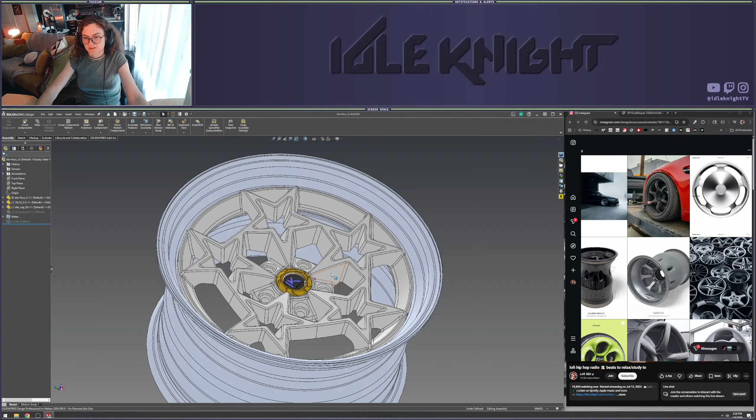For the next 2 wheel designs in this series, I'll start from scratch and explain the basics of where I got these, or how I created the models for the hoops, and even the basics of 3-piece wheels and the manufacturing process of billet or forged or multi-piece wheels, whatever you want to call them.

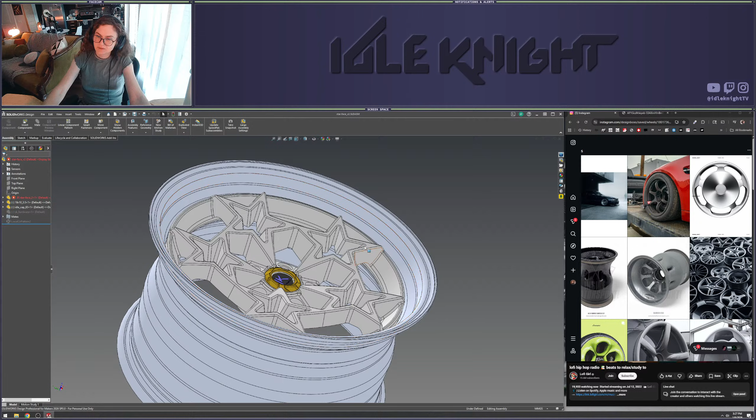These are going to be designed for CNC machining and will be produced in California at a facility. I can go into that later down the line, but at the moment we're just making things that look cool.

Once I make the next one, I'll explain more of how I know how large to make these, the kind of manufacturing constraints, center cap mounting constraints, and how to make them actually attach to a car.

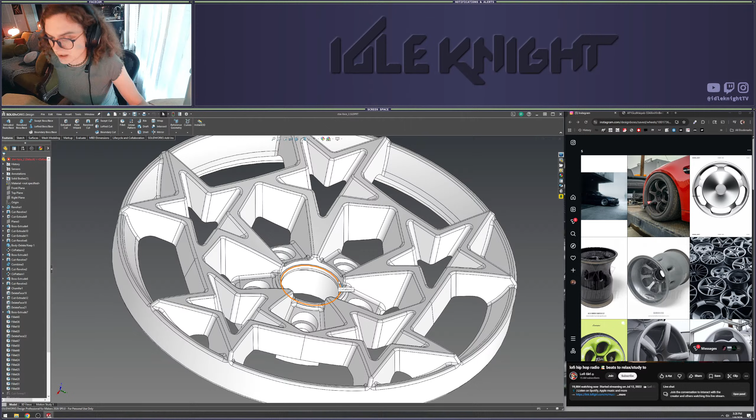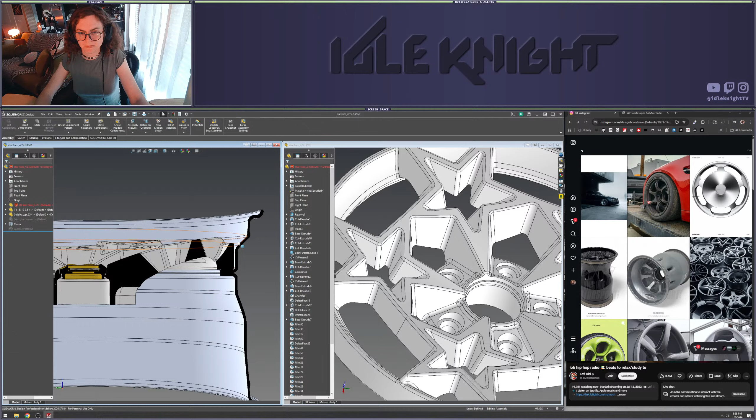The customer wanted me to work on this outer area and make it flow better with this step in the outer lip, and then possibly come out over that to kind of overhang on this lip here.

But at the moment I'm just going to be kind of cleaning some stuff up here.

Setting all this stuff up was easy. It wasn't that easy, but now that I'm actually on the stream and doing stuff, it's like, what am I doing? What is design? What are wheels?

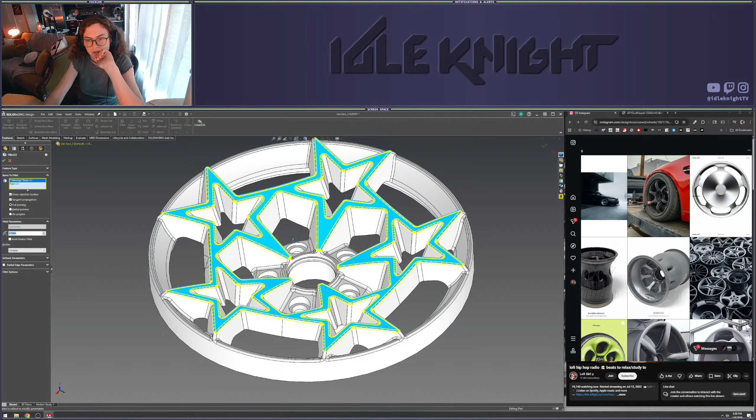At the moment I'm kind of just cleaning up this feature tree a bit so I'm working on a file that doesn't have any errors. It looks like last time I was working on this I was kind of rushing through stuff, so some of it was a little messed up.

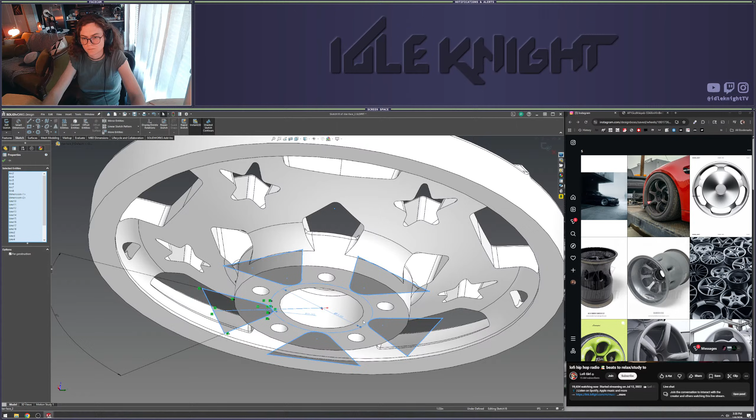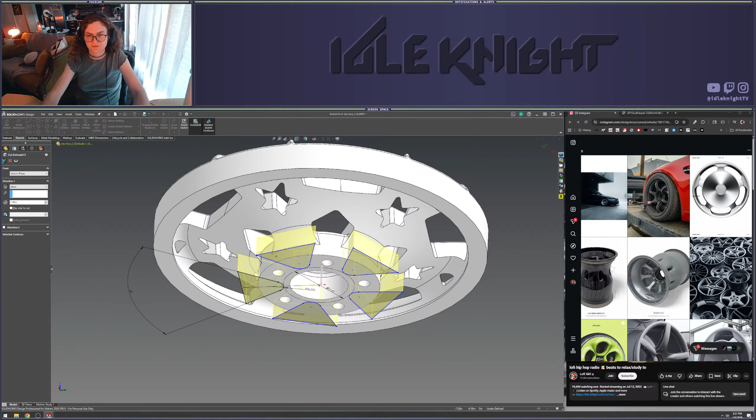Where's the error? Gosh, this software is... I updated SolidWorks to the new version and was kind of hoping that it would be better, because it's a bit shit. Just always finding ways of screwing things up and making things annoying.

Oh, that's a little error. Oh, there we go. Alright.

So it's SolidWorks, you're working on planes for everything. Gosh, here, let me heat up my coffee. Sorry.

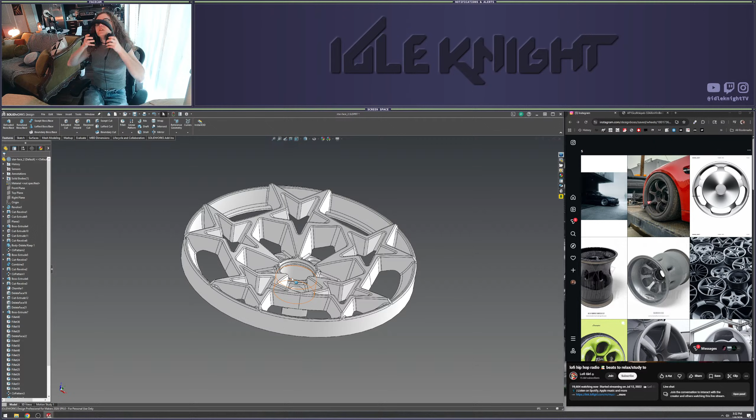We're back. We're so back. We're so fucking back. Wait, can I say fucking on here? I don't know. Alright, hot coffee.

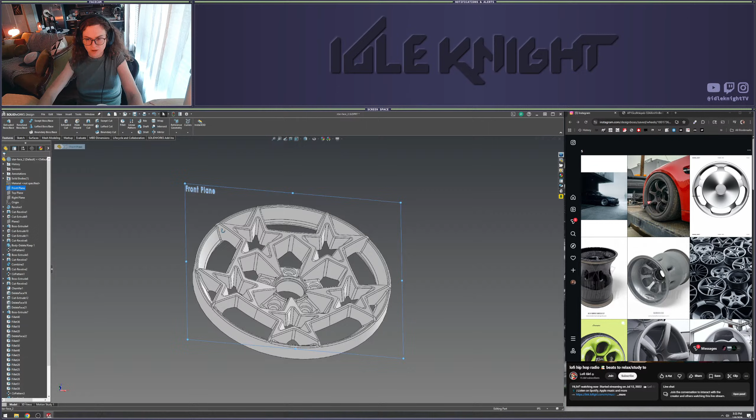So the basics in SolidWorks is everything is based off of these planes. So we have front plane, top plane, side plane, or right plane.

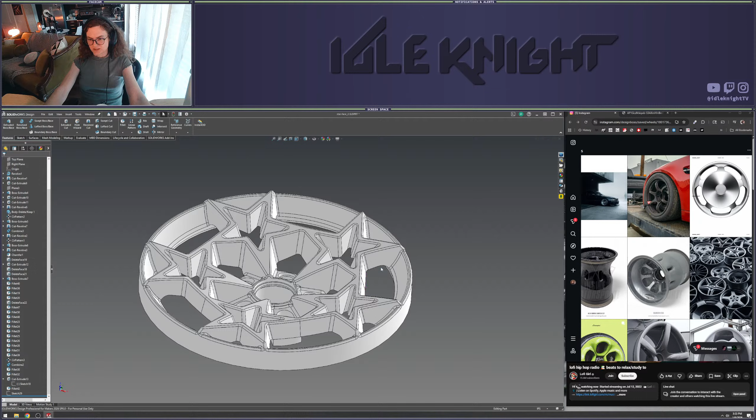Everything starts with just sketching on those planes and is extruded or cut from those planes. It's very different from Blender, 3ds Max, Maya or Cinema 4D, where those programs work with meshes and are much better for creating stuff for video games, because they can make clean, simple meshes that can be rendered in a video game environment or for animations. Whereas this is not a mesh, this is just sketches off of a plane.

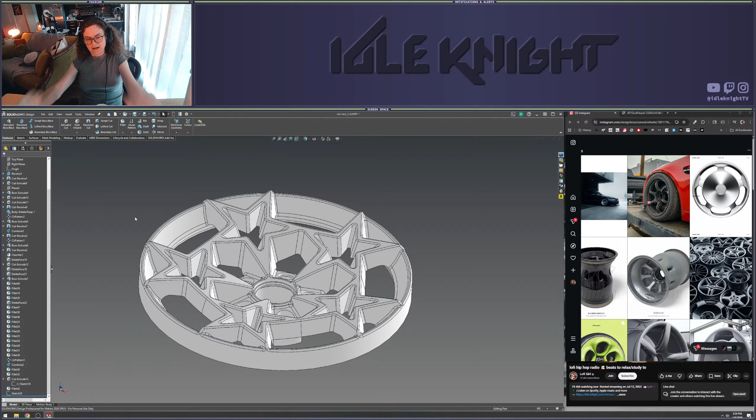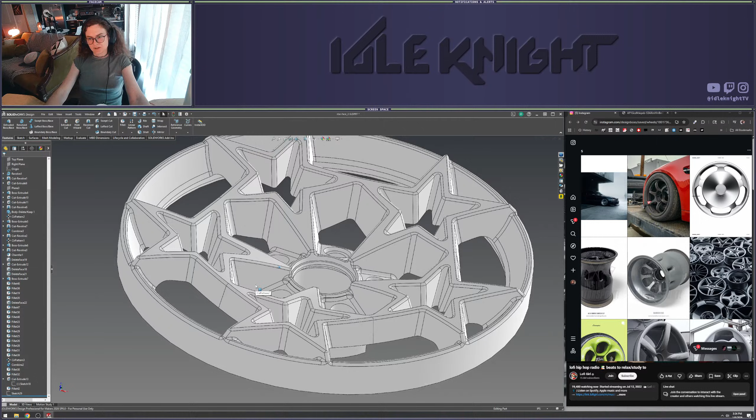It's kind of convoluted, but it's similar to the vector versus raster thing, where raster is like pixels and vector is like math. So it can be expanded out and back in and still have the same perfect curve, because this isn't a mesh, it's like there's math saying the radius of this curve is something. So even if it's a mile wide, it's still gonna be a perfect curve, because it's based off of those equations.

But also everything is constrained by values like millimeters and inches. So depending on where you're working - unfortunately manufacturing in the US, where I am, uses imperial measurements even in machining. So I'm kind of forced to do stuff in inches, even though doing it in millimeters would be considerably easier.

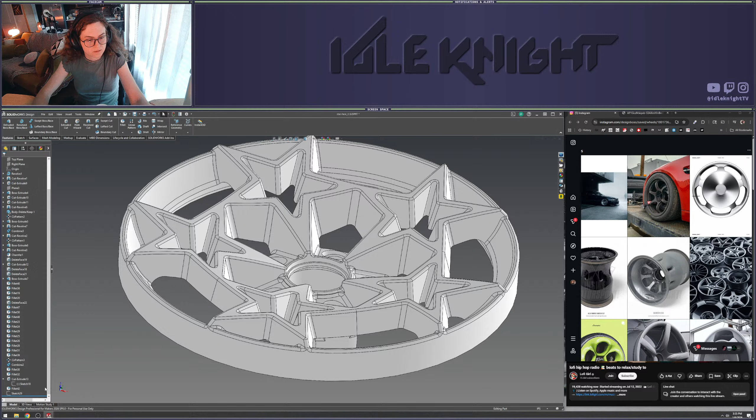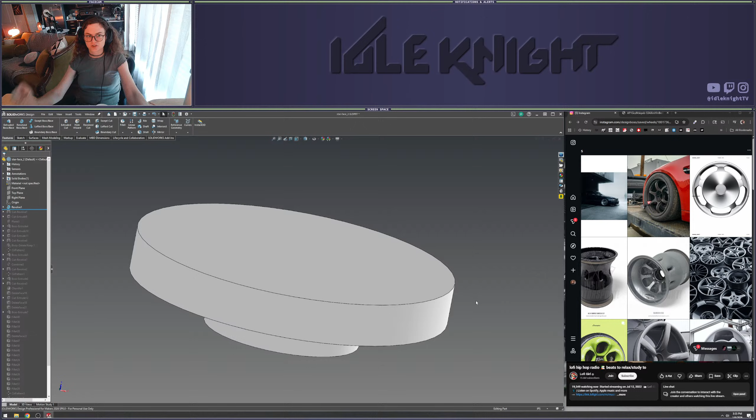But we'll go through how this is made. So at its base form, this is a piece of billet, a chunk of aluminum that was put in a 10,000 ton press - a giant industrial machine that heats the metal up and then compresses it into this shape using 10,000 tons of pressure. That shrinks the molecular structure of the aluminum and makes it stronger than just a regular chunk of basic aluminum.

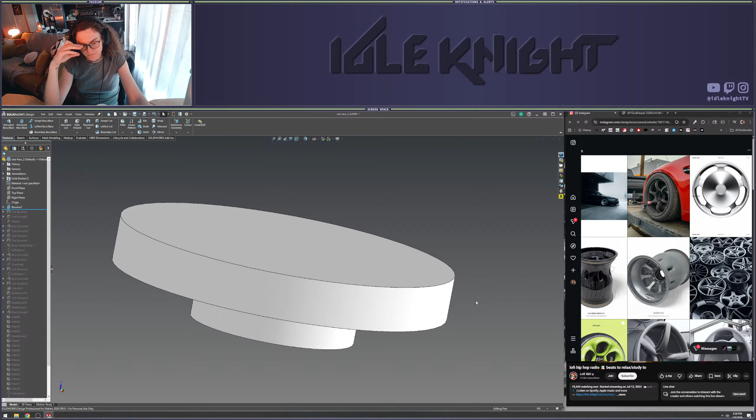So when you see 6061 forged aluminum, 6061 is the specific alloy - that's the percentages of different types of metal in the aluminum, because it's not just pure 100% aluminum. There are additives in there, I'll have to look up exactly what those are, but it makes it stronger or more resistant to water, and aluminum doesn't rust. It makes it degrade less, and it makes it stronger.

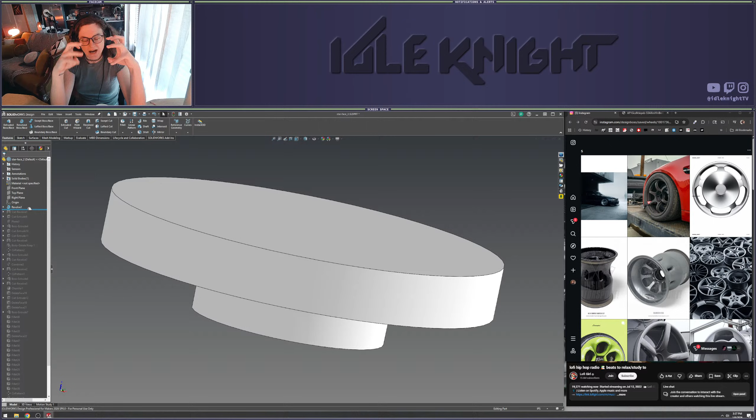And then once you forge that, it becomes even stronger, because it's shrinking the molecular structure down into a tighter structure. So then we have this billet of aluminum, and this was created using this sketch.

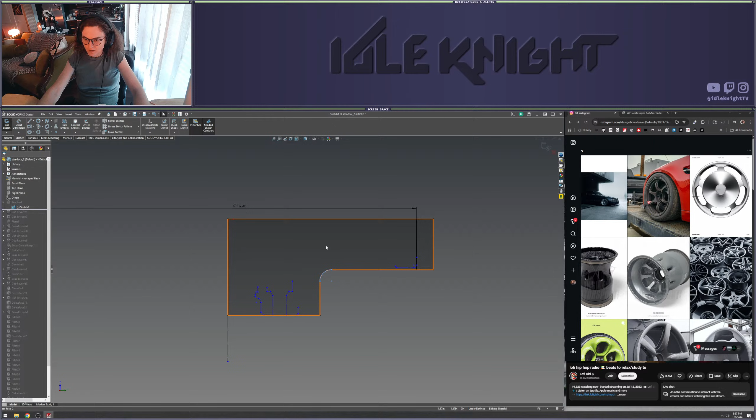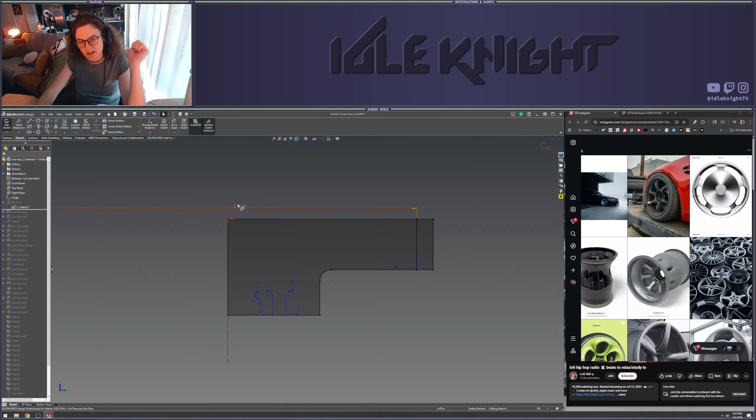This is from the manufacturing facility that is making these wheels eventually. So this is just a cross section of that. And then in order to fit inside the lips and barrels, or hoops as people in the industry usually call them - so in order to fit inside the hoops, which is the front and back lip that the tire actually mounts to - these are 18-inch wheels with a stepped lip, and so that outer diameter is 16.4 inches.

So this is that. I'm just simplifying the file so that I'm starting with the right outer diameter. And then these are some extra sketches that I pulled from a wheel that I previously manufactured, which shows how the center area needs to be for mounting of the center cap, and then the lug holes as well.

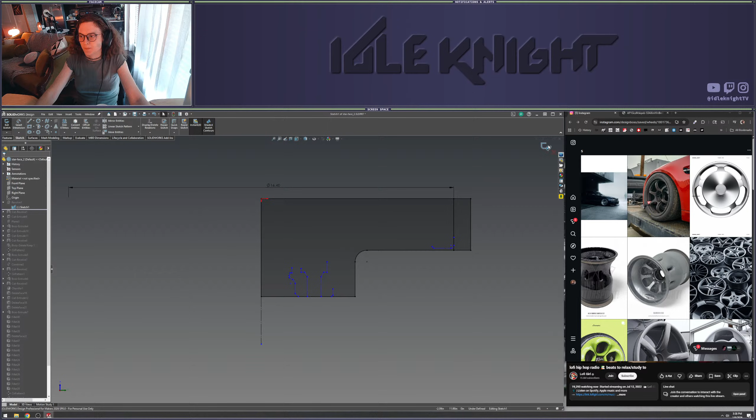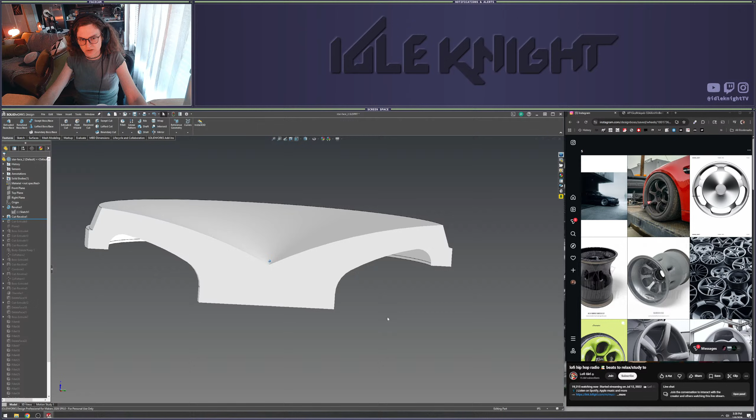But so we've got that, we just did that sketch, revolved it, now we have this. And then I like to get a general profile, let's say, side profile of the wheel. And so I have this - basic form, boom, there's that profile.

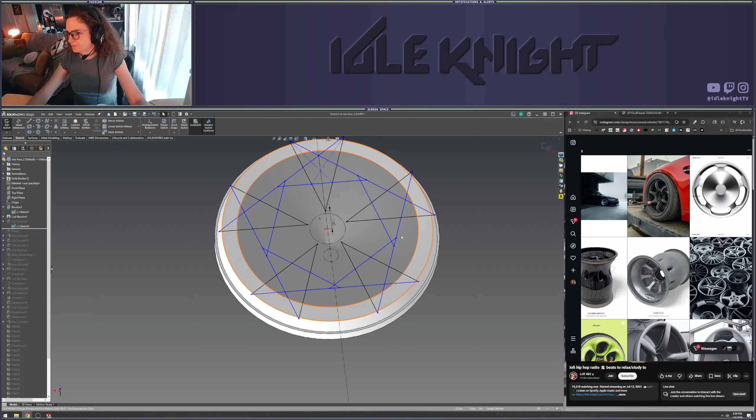And then I started sketching out the wheel design. So this client wants the spokes to be shaped like stars - or sorry, that was the previous one I did, that was hearts. He had previously had a set of wheels that I designed where the spokes were shaped like hearts, and he wanted a similar design to those, but stars instead of hearts.

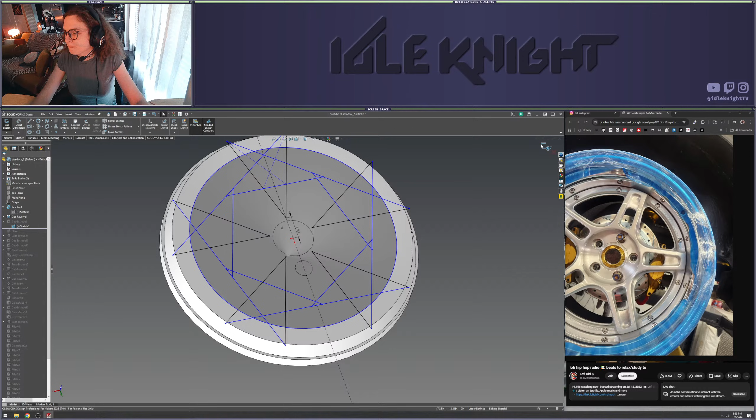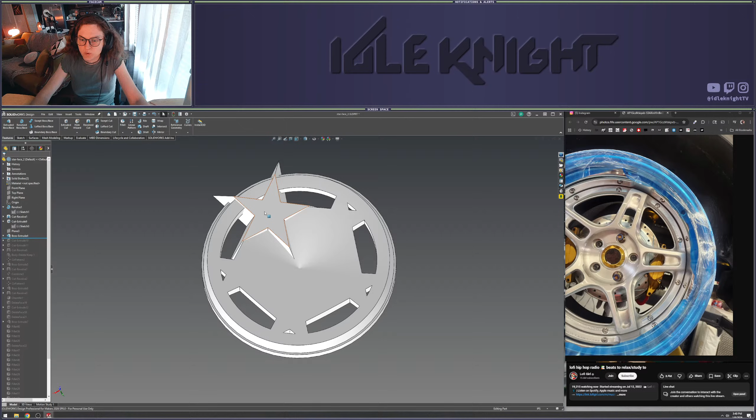I decided the easiest way to get these star shapes in an aesthetic way would be to create them separately. So this is going to be done a little bit different than a lot of the wheels that I do. I don't like the spokes to be cut just like straight cuts down through, so that the walls of the spokes are just like this. I feel like that is really basic and it leaves a lot of room for visual interest and coolness.

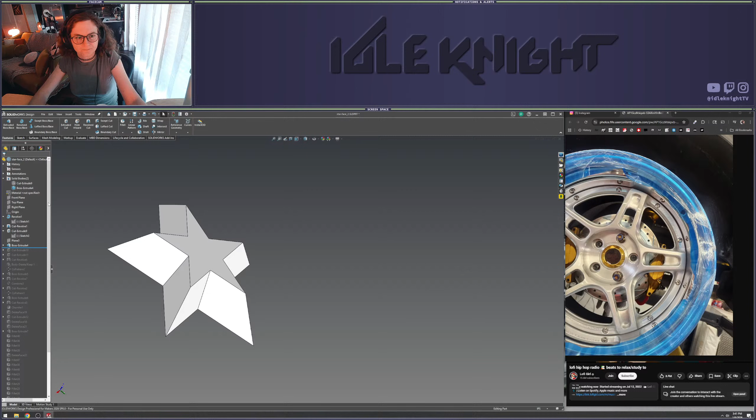And so instead we're going with a lot like angled edges - what is the draft? I guess you could say they're drafted outwards. And so this is that basic star shape that I made.

And we're gonna cut the center of the star out. And then that original billet piece, all I needed from that is that outer ring, which is where the wheel mounts to the hoops.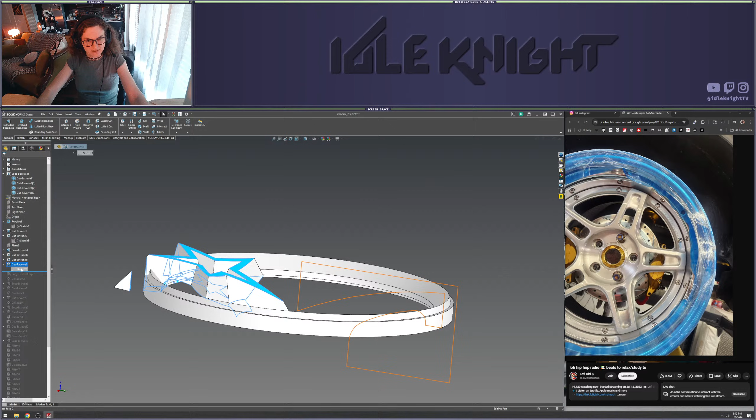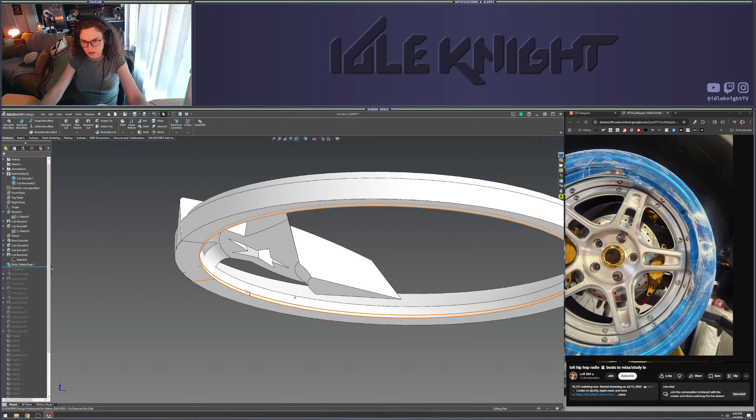So I cut out the center of that, but I still want this star-shaped spoke to follow that outer profile. This revolved cut is basically a copy of that initial profile sketch I showed you earlier. And then we're cutting out the star, and then we'll get rid of those little bits on the outside. Now you can see this star is already starting to look like a spoke.

And when we copy them around, boom, there, now we have 5 star-shaped spokes. So we're getting into it, let's see.

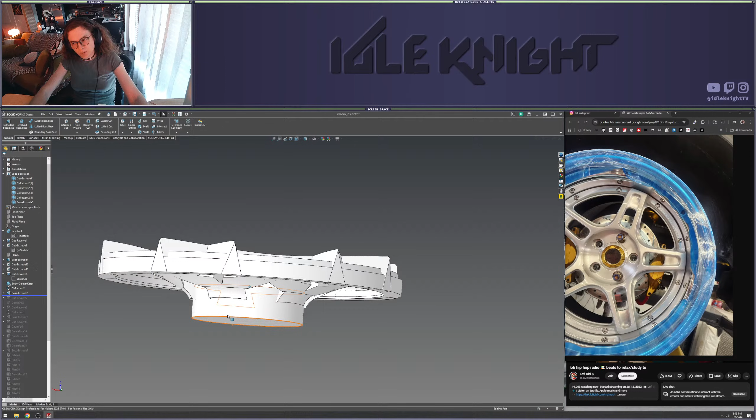But we still need a center point where the wheel mounts to the car, because we need those lugs, and we need it to mount to the car. You can see on the right here, I just have this up as an example.

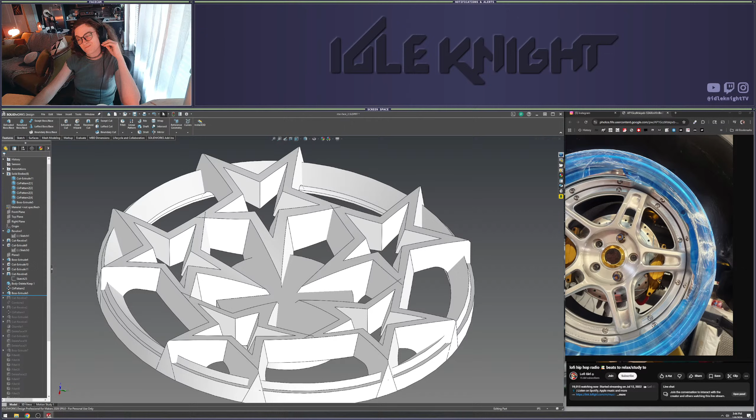This is the last wheel design I did for a friend here in Denver, and they finally came in the other day, and I went over there and we did a test fit on the car. You can see the wheels are still wrapped in the protective film and don't have tires on, but we wanted to make sure they lined up nicely with the brakes, didn't hit anything, and thank goodness they didn't. They all fit, so everyone's happy. Once he gets tires and stuff, we'll go over there and get some pictures of the wheels actually on the car. But I figured I'd keep this up on the side of my stream just to show you a real world example of something I've designed in this same manner.

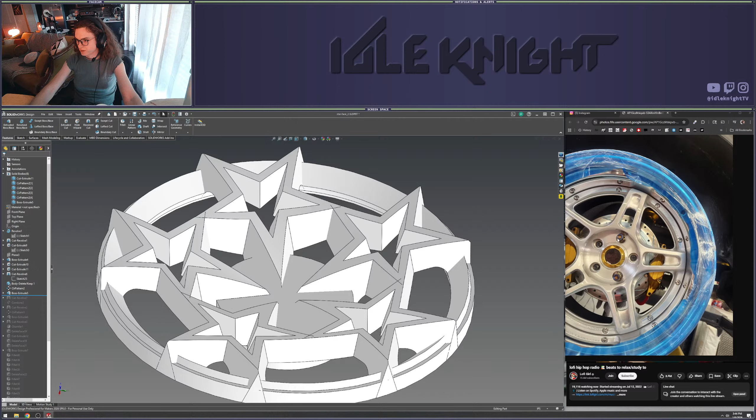And you can see that it needs that center area where the lugs mount. So we're just adding in essentially a little cylinder in the center, now combining it into one piece.

Here's one of the lug holes. And this angle there has to be a specific angle because there's a standardized pitch for lug nuts, so that you can get whatever set of wheels you want, and the lug nut, as long as they're the right bolt pattern, gets held onto your car and they don't fall off or rattle.

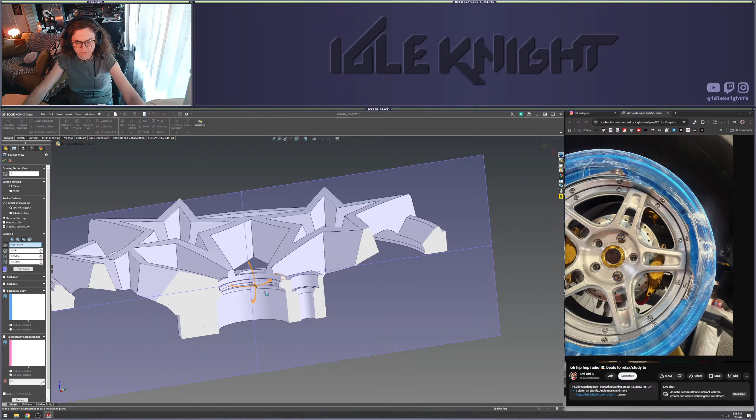And then just working on making it look a little bit more interesting, and then cutting out this shape here. And so this shape is a standard, like this has to be this way.

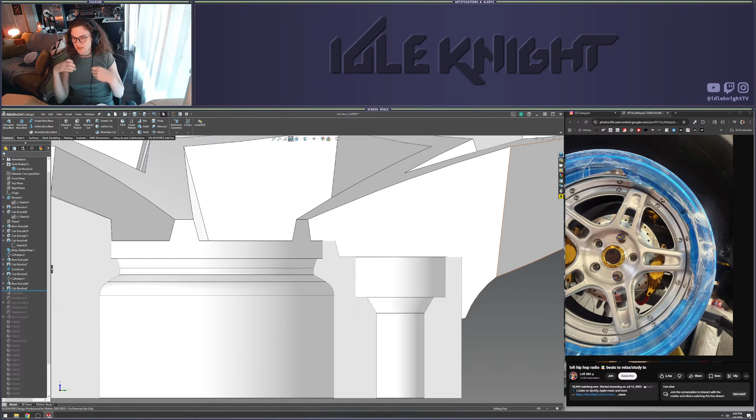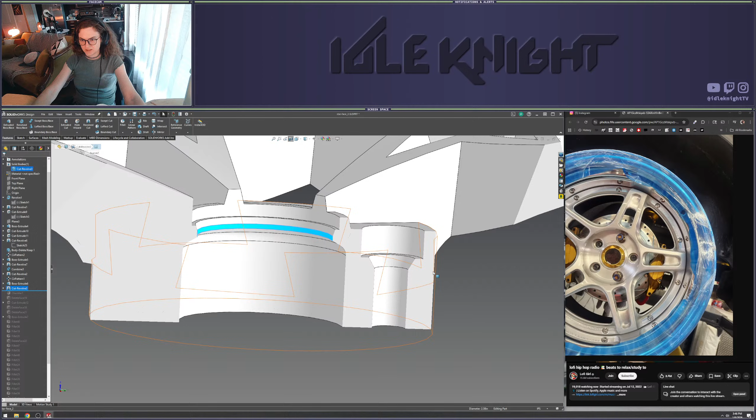So that center cap, you can see on the right here, this gold piece with a little carbon fiber bit in the center, snaps in. The center cap has a little rubber gasket, and when you snap it in, the rubber gasket will go past this corner right here, and it will hold the center cap into the wheel and keep it in there even when you're driving on a racetrack or on the highway. So the wheel needs that exact shape.

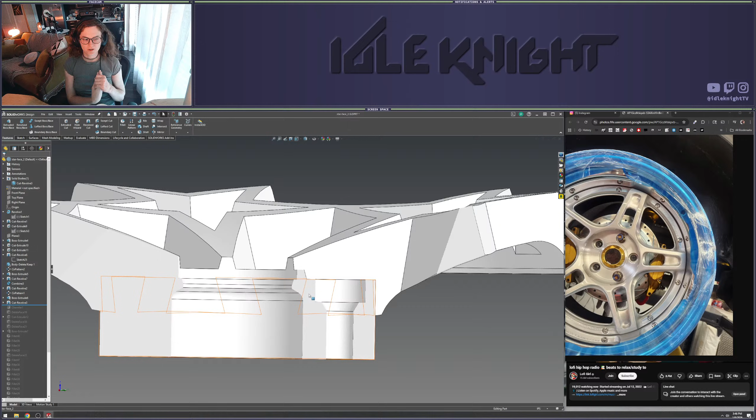And then I wanted it to not be just a cylinder around the center there, just because, yeah, you can see that's just kind of ugly. You just want to address every part of the wheel you can and make sure it looks good. You don't want it to be too busy, but you want to make sure you're thinking about every little part of it as you're doing it, so that you have a thoughtful design at the end.

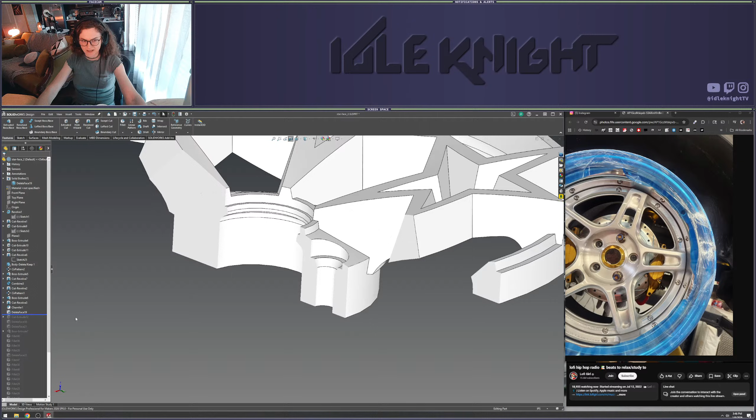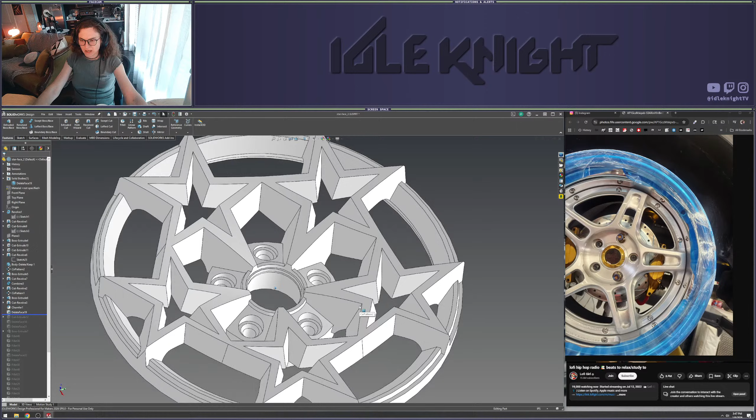And then once I had this basic wheel here, you could see if this was made, it would bolt to a car. The center cap would attach to it. But it has really hard edges and corners, and nothing in real life is ever a perfect corner.

Even if you just mill the top and the side of a piece, that edge will be sharp, yes, but when you start zooming in, it's gonna be rough. It's not gonna be just like a perfect line like it is on the computer. And so you want to control every one of those corners.

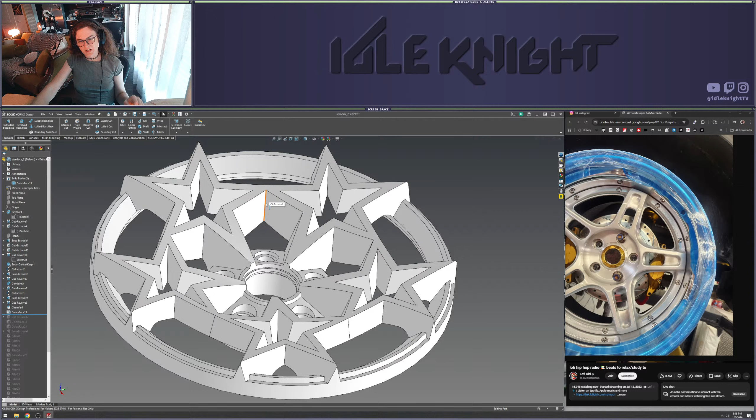Every one of these edges needs to be controlled by you, because if you don't control it, the machinist will. The tool they use to cut these out is essentially a really fancy drill bit in a CNC machine, and depending on the diameter of that tool, it's going to round these edges no matter what.

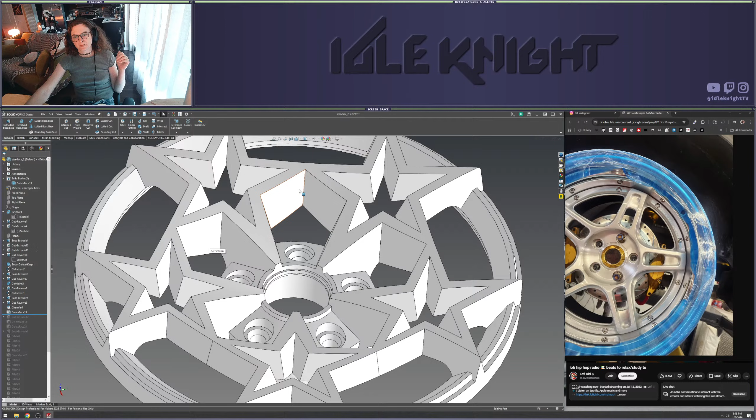If you don't tell them, they're just going to say we can't make that. If I sent this thing and said make this, I would essentially be leaving those choices up to the machinist. And I want those choices to be mine. I want all of these edges and corners to be my choice.

The easiest way to do that, I've found, is to cut the wheel into one spoke and then just repeat it back around into five. That's essentially doing one fifth the work. So why not?

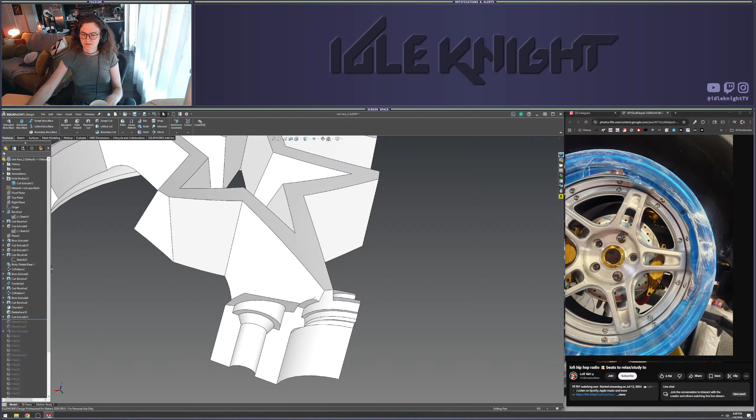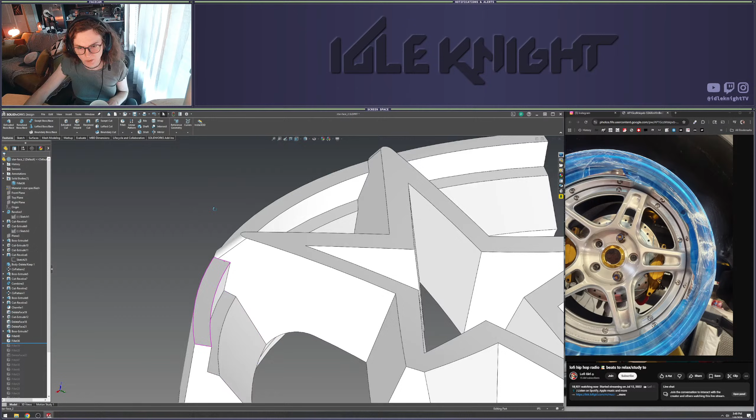Oh gosh, all this talking is going to be rough. Okay, see where we went next. Okay, so I end up doing stuff in some kind of weird roundabout ways sometimes. I'm trying to get better at doing things with fewer steps, and making this feature tree simpler.

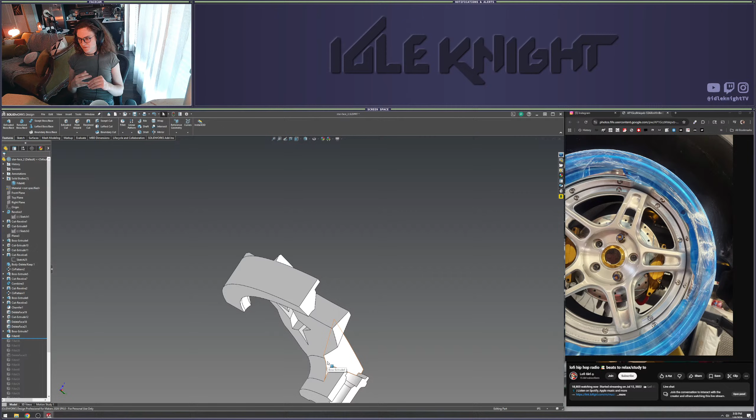But at this moment, we're just gonna make it look cool. That's the goal. Oh shoot, okay, so first thing we do is some fillets. Fillets is, I guess, a manufacturing term for rounding a corner or rounding an edge.

You can see I made this large fillet at the bottom, bringing the spoke into the center hub area. This visually looks better, but it's also stronger, because that nice big sloping curve is going to distribute weight around better than if it was a tight little corner, which would create a weak spot later on.

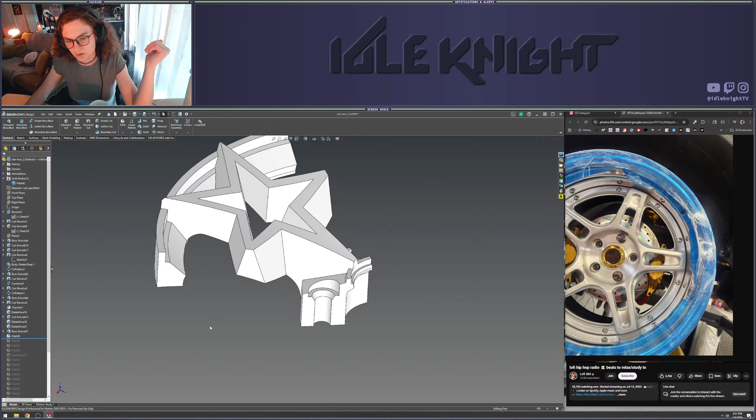At some point in this stream I'll show the actual stress testing, because in SolidWorks or Fusion 360 or any of these pieces of software, they usually have some sort of FEA, finite element analysis testing or simulation capability. That's basically where you choose materials, like 6061 aluminum, and then simulate forces being exerted on the wheel to figure out where the weak points are before it's even made.

So like these wheels on the right, before I sent them for manufacturing, I tested the wheel to make sure that the assumptions I had made, like these spokes having this nice I-beam shape and this thickness, would be strong. Yeah, I can probably guess at it, but it's much better to do these simulations so that at least you have a simulated confirmation that your assumptions on strength and design were correct.

And then I'm still going down this feature tree on stuff I've already done, just kind of explaining my way down. This thing on the left is called the feature tree, and it's just a history of things I've done, which is probably the best part about SolidWorks, having a visual record of everything you did.

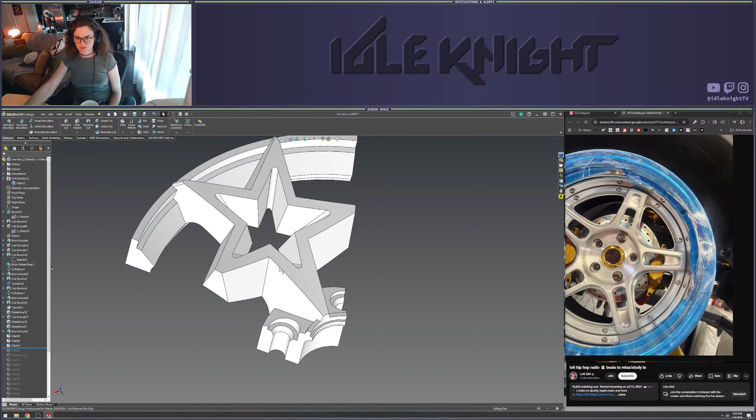You could even delete stuff out of it in the middle. It might cause a lot of problems, but you can move things around in the feature tree. You can go back and edit one part, then bring the tree forward and see what happens. It means everything you've done is reversible and changeable, unlike in Photoshop.

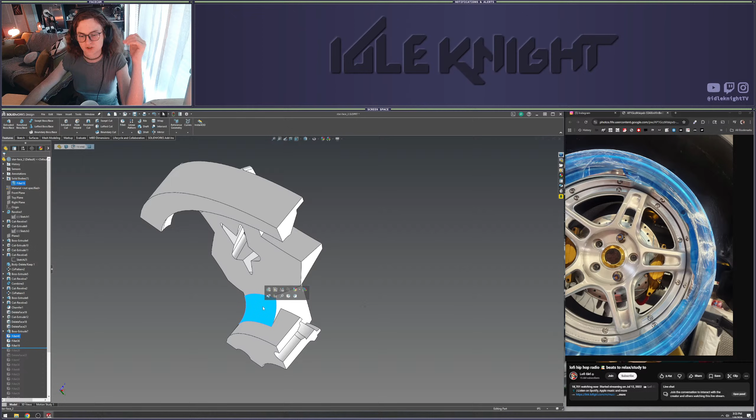If you blur a section of an image and save it, then open that again, you can't get those pixels back from blurring that. Whereas in this, if I want to go back and change this thing, or even the diameter of the wheel or the bolt pattern, I can go back and just open the file at any time. So that's pretty sweet.

So this is just fleshing out the actual design. Like I said, you can't have any sharp corners, and you really don't want sharp corners on wheels, because imagine you or the person you're paying to mount the tires, they're grabbing your wheel and they slice their hand on a sharp edge.

Also, once they go into the finishing of the wheel, all the edges are going to get blunted in the polishing and surface finishing stages. So nothing's ever going to be blade sharp anyways.

But these rounded corners are stronger because if you bump it on something, like if it goes to a point, that little point is gonna chip off. It's like if you have a kitchen knife and you bang it on the edge of a counter, you're gonna chip that thing. But if you bang the back side of it on that, it's probably not gonna do anything because it's thicker. So it's stronger. Everything needs to be rounded at a certain point.

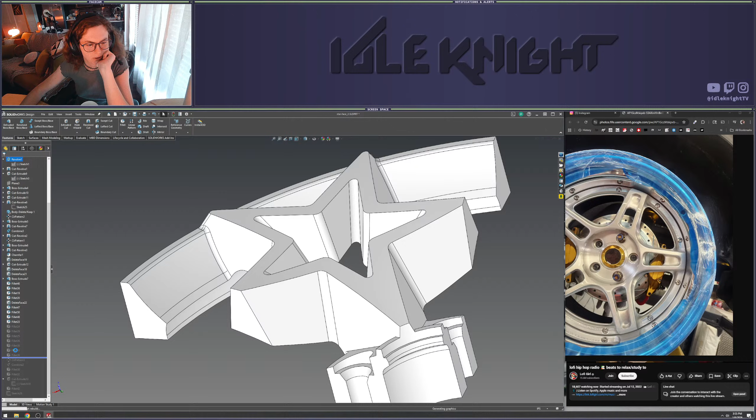So you can see all of these are fillets. This entire part of this feature tree is just rounding stuff off. And now you can see these forms are starting to flow into each other. And you can even take off the corners, and you can see these nice rounded edges are gonna reflect light in a much nicer way than if it was just a bunch of sharp edges.

And then we're gonna just copy and radial repeat that all the way back around, put that final top edge fillet on there. And then the last step for me on the wheels is this back pocketing, it's called.

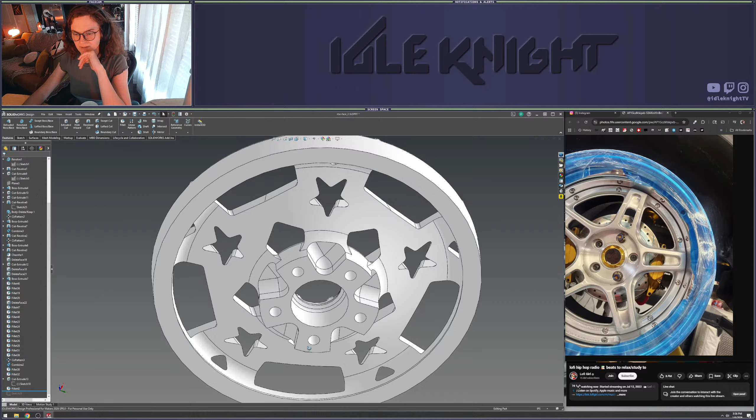It's not necessary, but it's gonna make the wheels lighter. And even if you're not driving a race car, you want your wheels to be as light as possible, just for making them easier to take on and off your car. But also in a technical sense, any sort of spinning weight is the most important thing to reduce.

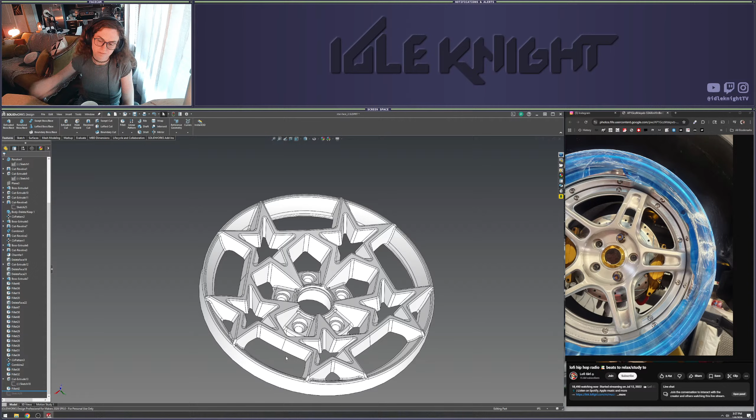Because as your wheels are spinning and centrifugal forces are pulling outwards, a heavier wheel is going to be worse than you'd think from just the weight difference. Once those wheels are spinning and you're turning the car around a track or something, even just a couple pounds lighter wheels translates to easier steering and a more nimble car.

But yeah, obviously these aren't going on a race car though. It's not the most— it's a form before function design, that's for sure. Oh God, I love caffeine.

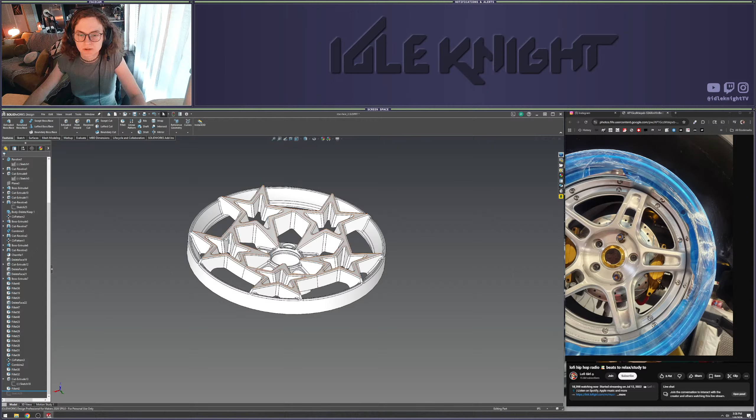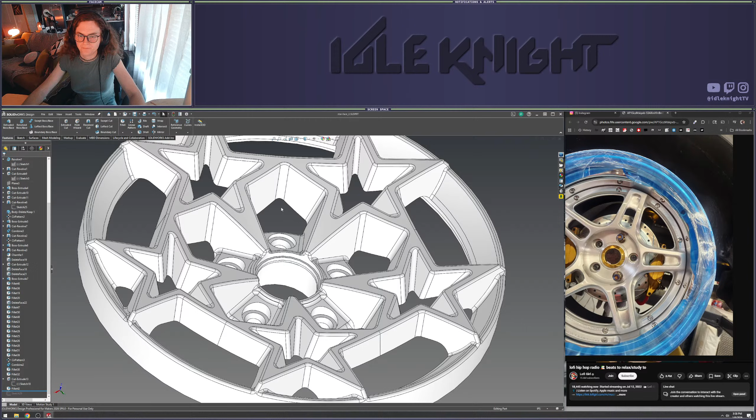Let's see, gosh, now that I explained all that, what are we even doing here? I guess we could just go into— we can go into the next steps and stuff, and then I'll have a better plan for changing the design for the next stream. But I think for this one, it's just mostly me figuring out the technical aspect of streaming to Twitch and YouTube at the same time, setting up all the devices and everything. It's better. Yeah, yep. What am I saying? Okay.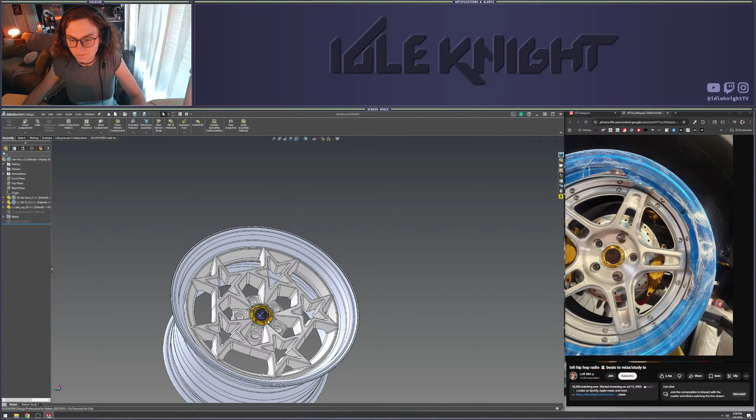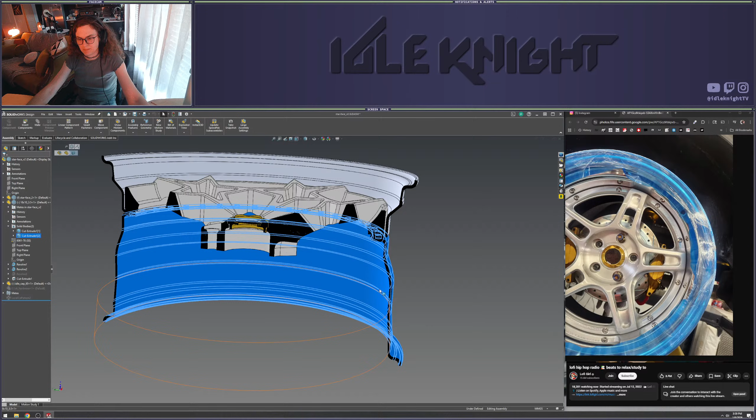All right, so let's go back to the full assembly, and you can see here we got the front hoop or the lip, and the rear hoop or the barrel. A lot of people will call them lips and barrels. The lip is the lip of the wheel that you can see, and the barrel is the one in the back—it's usually larger. So we've got those. This is an 8.5 by 10 inch wheel with a 3.5 inch lip.

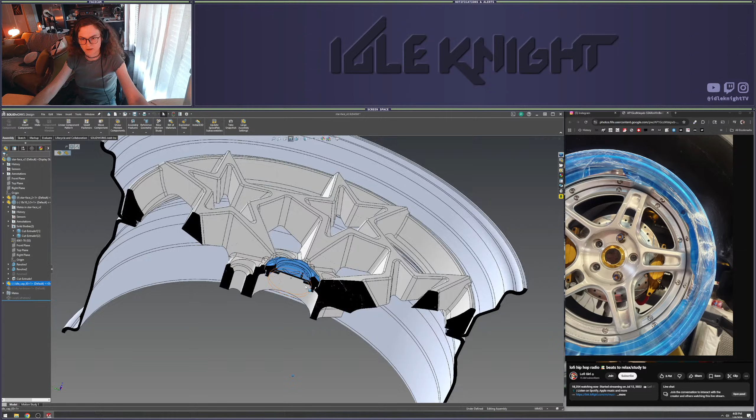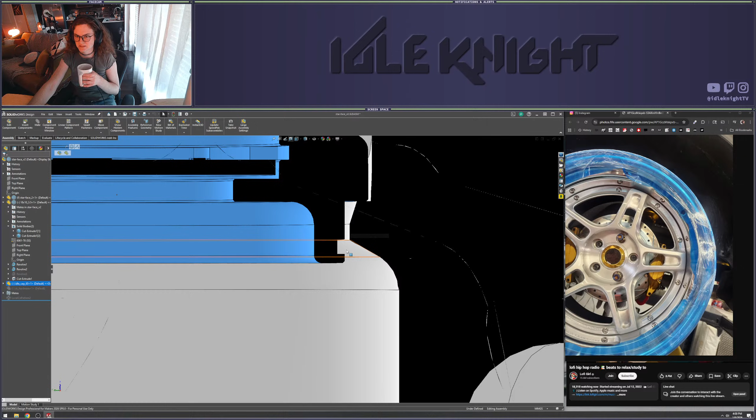And then we've got our center cap. You can see right here, this is the little notch for the O-ring that's gonna hold this thing in. You can see it sits flush against there, and then the O-ring pushes, as you're pushing it in, past down this slope and then pops past this edge. Boom—now that center cap is stuck in there, and if you want to get it out you can, but it's not going to come out while you're driving.

And we've got our wheel face. The only thing missing from this assembly would be the wheel hardware. You can see all the bolt holes for said hardware, and the standard is 40 bolts to hold it together. On the right side here on this wheel, we've got 10 bolts visible, but that doesn't mean this wheel's only held together by 10 bolts—the other 30 bolts are just screwed in from the back instead of from the front. But this was kind of just a visual choice; we wanted to have these 10 bolts exposed on the outside.

Yeah, so we've got that. So we'll export this thing, and I'm just gonna temporarily put stuff in here. I am gonna have things better organized in the future, but at the moment, this is how we're gonna do it.

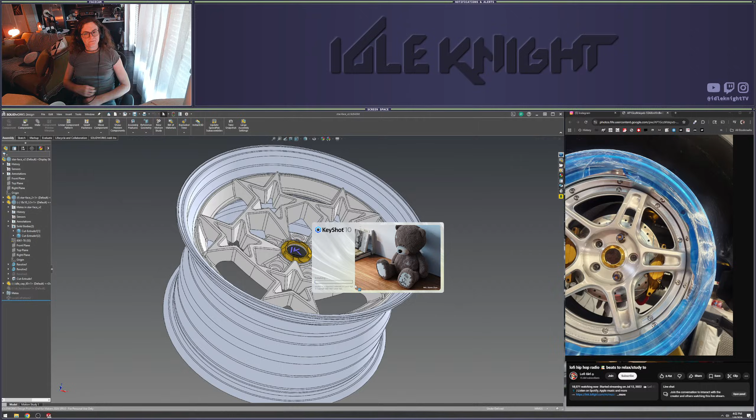And then the fun part, and this is going to be another kind of testing for the stream thing, just to see how well my computer can handle doing all this stuff at the same time. We're gonna do some renders to see what these things could look like if they were machined.

So I exported the file from Solidworks, from the 3D CAD software, and now we're bringing it into Keyshot, which is the rendering software.

And I'm actually gonna... oh, look, there it is. I'm actually going to bring up the task managers so I can monitor on the other screen what this is doing to my computer, essentially.

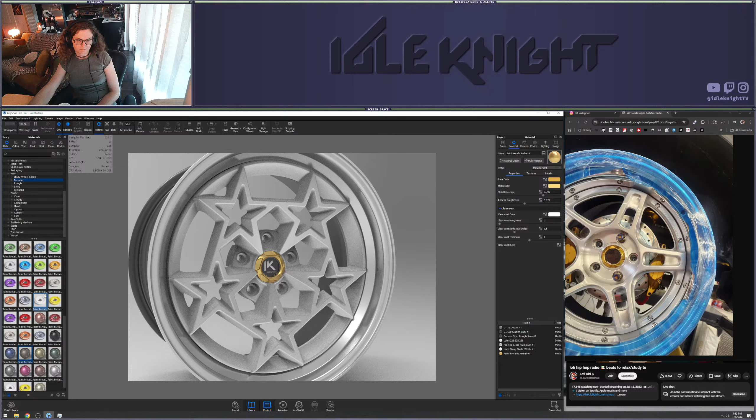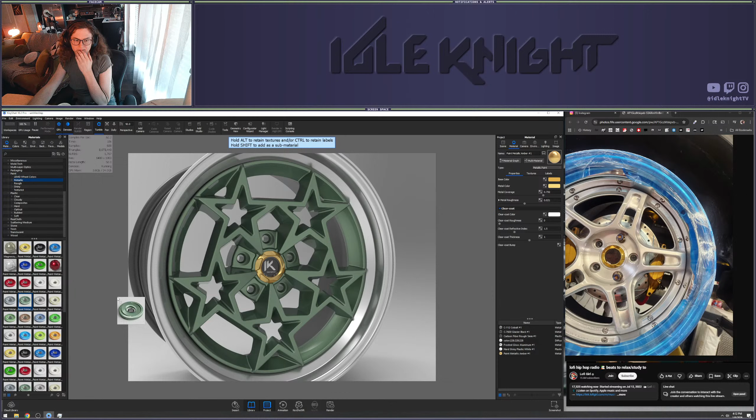I would have such a hard time choosing wheels for myself, to be honest, because I have all this freedom to test it out. Yeah, I would have issues. I do kind of just like metallic silver.

And then, so like, okay, we've got our basic wheel, but this is a really boring scene here.

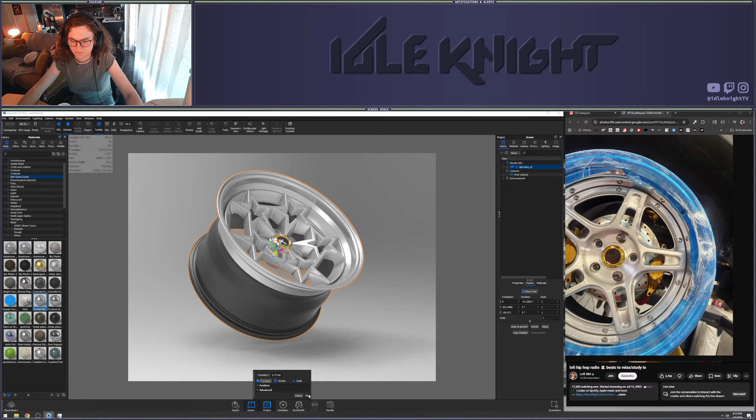So we're gonna kind of doll it up a little bit. You can see already facing the wheel up towards the lights has done a lot for how the wheel looks - got these nice big reflections. Looks nice, but still boring because the background's essentially the same color as the foreground, and that's kind of lame.

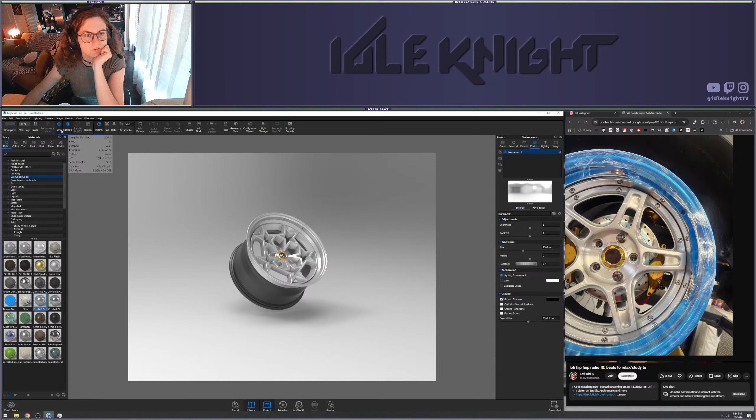And also I'm just making use of the lighting environment that starts when you open the software, and that's also kind of lame and boring. So we're gonna just create our own lights.

So I just brought in a spotlight. We're just gonna put that there, and we're gonna turn the brightness of the background to 0 so that we're gonna make all of the lights ourselves. And you can see already the drama of just this one spotlight above here. That's cool.

But let's see, we want to do something a little different, something a little bit more complicated.

So rendering in this and creating the lighting environment is essentially like in a lighting photography studio - you just do it all the same way. So if we look up on Google, lighting studio...

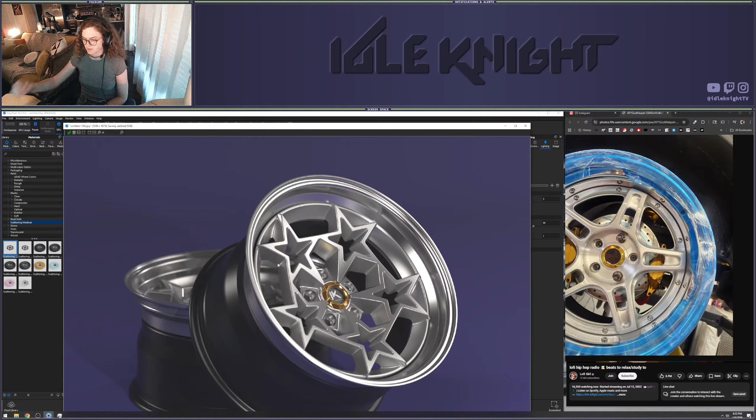Just pull up this final image here. Beep boop, beep boop, beep boop.

Even the fastest computer can't process just the organization of files.

Okay, so here's this final render that I walked you guys through and we did together. I think it came out really great, looks pretty photorealistic, and hopefully we'll be doing some more in-depth design stuff next time.